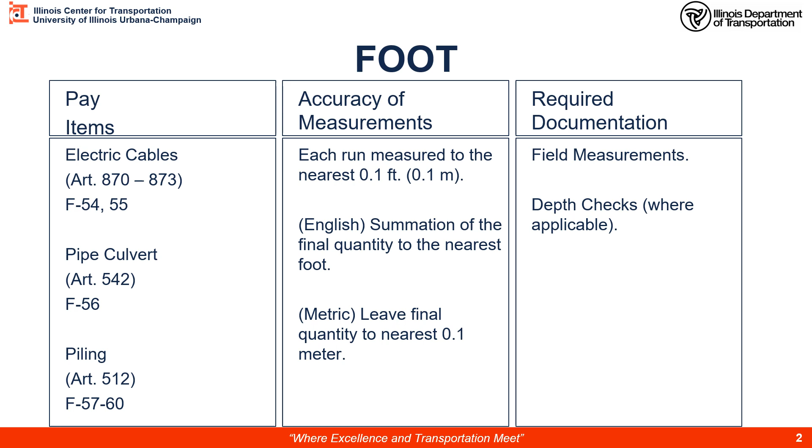Before we get too far into traffic signals, let's discuss the various components and the symbols that represent these components. First of all, there's a controller box, and this is its symbol, kind of an X with different shaded portions opposite each other. A foundation represented by a dark circle, and this could be a foundation for a signal post or a mast arm pole.

And then handholds, and there's two types of handholes, actually maybe three. There's a single handhole, and as you might imagine, if you have two of these symbols together, it's a double handhole. Sometimes you will see handholds in the traffic lane, as this one is, and it may be called a double handhold heavy duty or a heavy duty single handhold. So don't be confused by the heavy duty aspect of this. As far as cable length, it still represents a single or a double handhold.

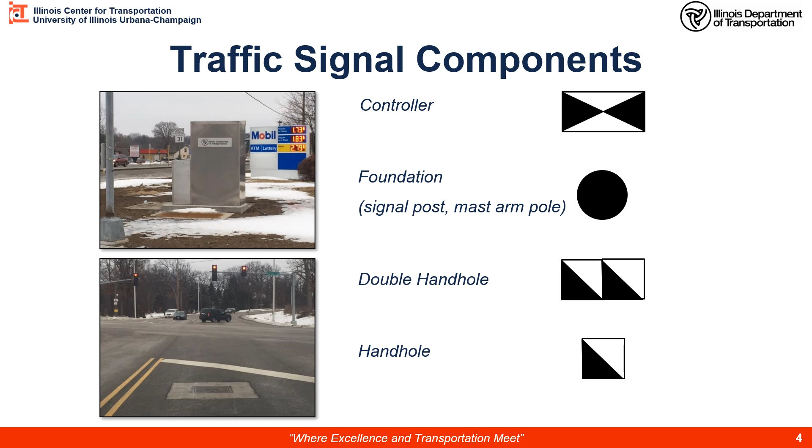Controllers also have foundations, so we must take that into account. Here you can see a post where a signal head would be up out of frame here. It has a foundation, so we must take that into account. And then on the mast arm poles, they each have a foundation. So these lengths need to be taken into account when calculating the cable lengths.

Covering some additional traffic signal components and their symbols. Here's a signal post. The circle represents the foundation, and then the arrow, the direction of the signal head. This is what it physically looks like. Here's your signal head, your post, and the foundation down here.

For mast arms, these are signal heads that are mounted on the arm. And then there's a type here called a bracket. This is a bracket mounted signal head. So these are represented as far as the mast arm foundation, the arm, and the direction that the signal head is pointing.

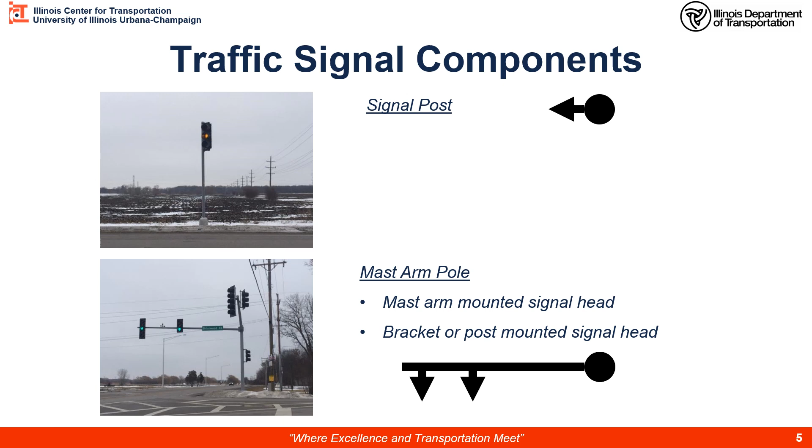Let's talk about the cable specifications. Here you'll find that by specification, all vertical, foundation, and handhold slack lengths are provided. So in the field, all we have to do is measure the horizontal lengths that are unique to your specific project. Let's first talk about the slacks. Most common in intersections are handholes, whether they're a single handhold or double handhold. A single gets 6.5 feet of slack, a double 13 feet of slack.

Moving on to the vertical lengths for different poles and posts. First of all, let's talk about the foundation. Almost everything has a foundation, right? Signal post, a mast arm pole, the controller all have foundations. Use 3 feet for the cable length on those. Mast arms that go up to the arm itself is 20 feet. That's the length you're going to use to calculate that height.

And then on the pole, if you have a bracket mounted signal, that's going to be 13 feet. And likewise, if you have a signal post, either a post mounted or a bracket mounted, that's 13 feet. Now, pedestrian push buttons are common, but for this class, we'll just deal with the poles and signal heads and the various handholds.

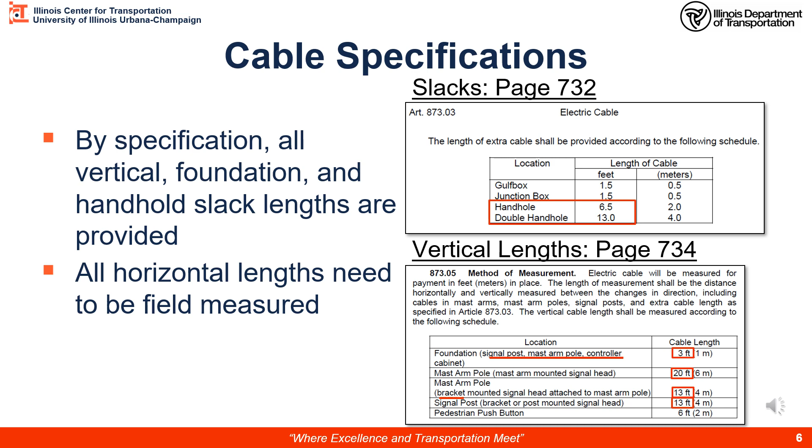Here we have a simple cross-section view of a cable run for a signal. First of all, we have the controller box, then we have the double handhold, and a single handhold. So we have slacks in these two. Then we go over to a signal post.

We also have foundations, right? Underneath controller boxes, underneath the post. So these are all provided by specifications. So the controller box has a foundation that is 3 feet. The post also has a foundation of 3 feet.

Go to the handhold. First of all, we come to a double handhole. That's a 13-foot slack. Then a single handhold. It's a 6.5-foot slack. And finally, the post has a vertical of 13 feet. So in the field, what we must measure is the lengths between these various features for our payment.

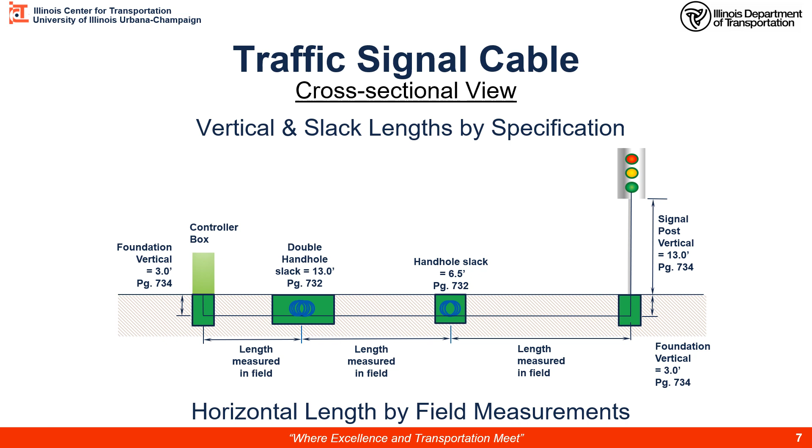Let's go to page F54 of your documentation guide. Here you'll find a field book laid out with some schematics of an intersection at Green and Goodwin. This first schematic shows the controller box, and then the cable runs to pole P1 and then to mast arm 1.

Notice that this particular pay item being looked at is for a 5 conductor. That would be for a red, yellow, green plus 2 additional wires, so it would be for either P1 or this first light on the mast arm. All cables are required to be home runs by IDOT, which means no splices along the way. So it's a continuous cable from the controller box to the signal.

This schematic gives some more detail because we have a number of handholds along the way. First handhole's a double one, 4 feet away from the box. Then in the intersection we have a heavy duty one, a single, another handhold, and then we branch off to the pole or post and to the mast arm. And that first signal head on the mast arm is 10 feet down to the 3 light signal. So you have all the information you need to calculate the pay length for 5 conductor signal cable.

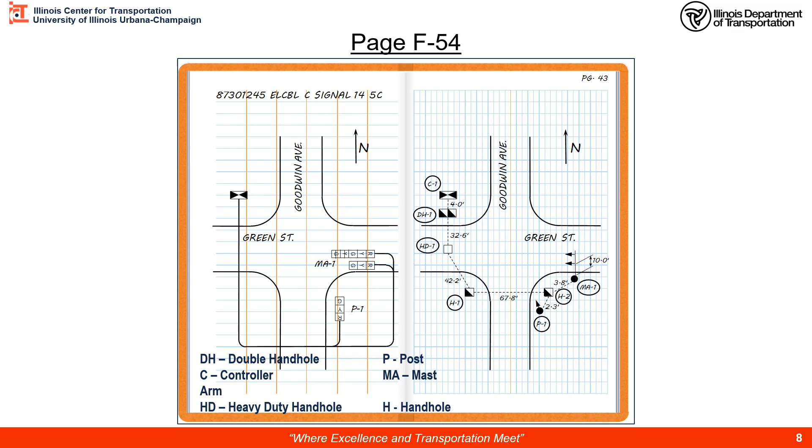So here's the same information, but in a cross-sectional view. Remember our controller, we have a foundation, a length, our double handhole, a length, our single handhole, which happens to be a heavy duty one, a length, another handhold, a length, then a handhold. Then we branch off into the mast arm or the post.

Then we have our vertical length plus a foundation for the post. At the mast arm we have the foundation for it plus the vertical length up to the arm and then 10 feet down the arm. So these 2 runs are what make up the 5 conductor pay item.

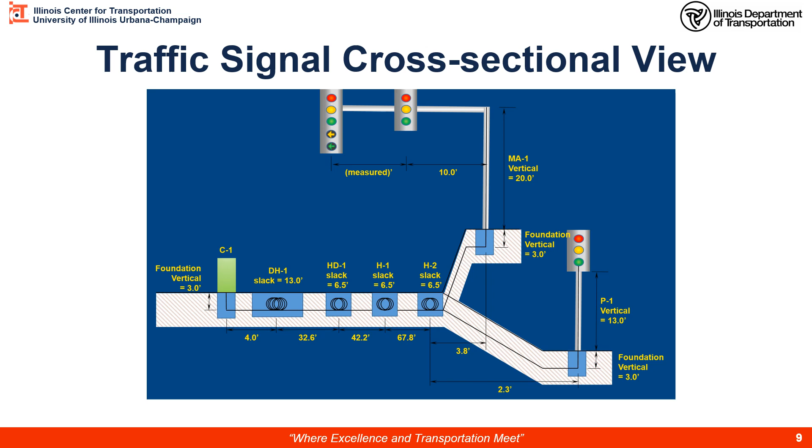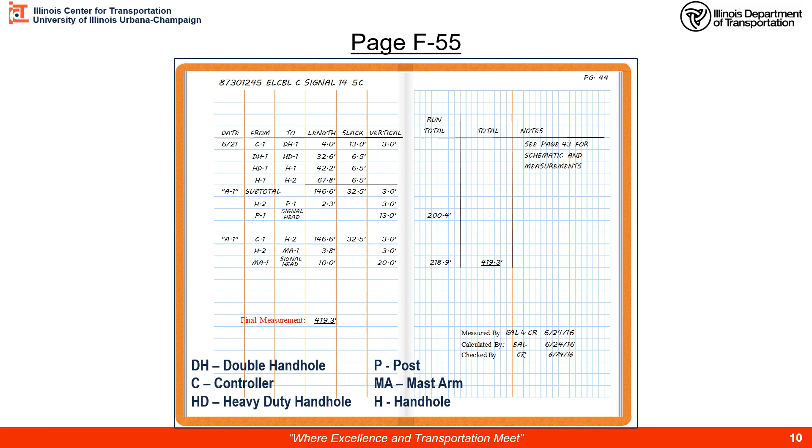Going to page F55 of the DOT guide to show you how these runs are laid out. This is that run A1 on the previous sheet, just to show you how they laid it out. And that is a common run to both the pole or post P1 and then the mast arm 1. So basically running this calculation as a subtotal and then adding on this little horizontal length and then up the pole 13 feet plus a foundation of 3 feet.

Likewise, on the mast arm from this point, you got that 3.8 feet, a foundation of 3, and then up the pole for 20 feet, and a final of 10 to the signal head. So just a little bit of accounting, how to do subtotals, so you don't have to recalculate all these runs continuously. If you have some common runs, just a little bit how to simplify your calculations.

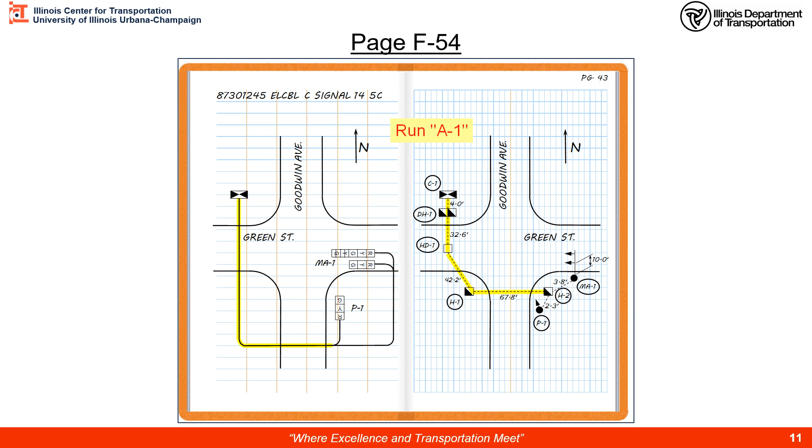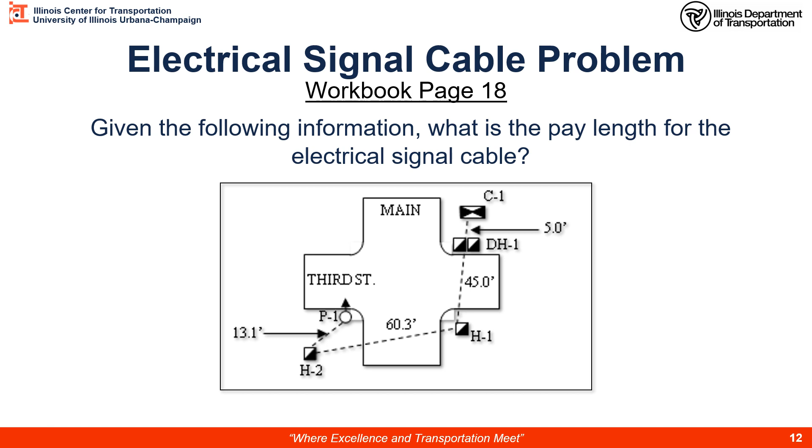Okay, it's time for a workbook problem. Go to workbook page 18 and work on this problem. For the answer, go to workbook page 35. Basically, you have a little bit of accounting here to do, a lot of things that add up, but you should have gotten 168.4 feet. Let's go over how to calculate this out.

Starting at the controller, C1, you got a foundation that's 3 feet, so you got to go down 3 feet. You measure a length of 5. You have a double handhole, 13 foot of slack, 45 foot of length to the next handhole, which is the H1, 6.5, and then 60.3 to the next handhole, which is 6.5 of slack, and 13.1, foundation of 3, and a vertical distance of 13. Those should all add up to 168.4.

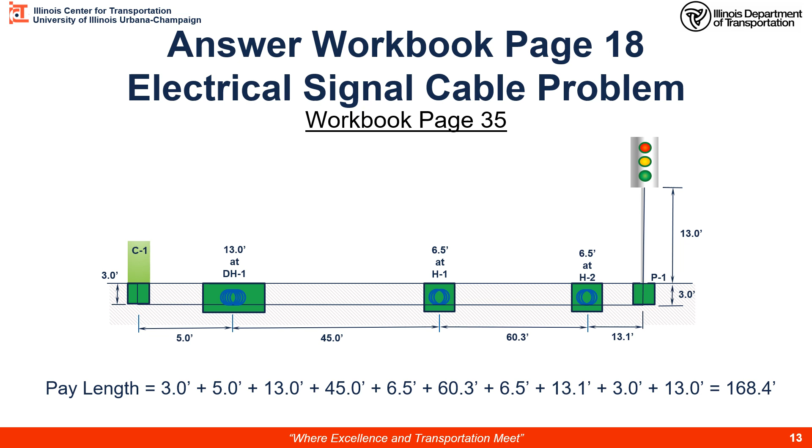Let's go to workbook page 36. It's also presenting the answer to the work problem on page 18. It's just a way that you could lay out your field book. It's not the only way, there are other ways. Whatever makes sense to you, but the main thing is to recognize that there are horizontal measurements, slack, and verticals to account for, and that all your accounting is properly done, and then it adds up to the proper length.

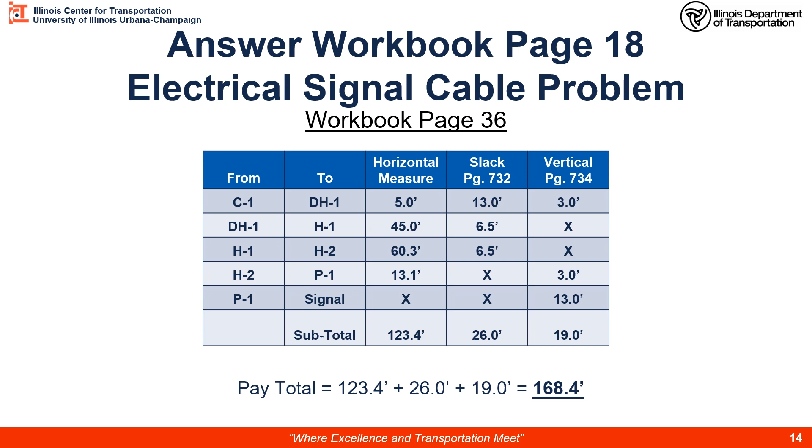Let's go to page F56 in the documentation guide and talk about pipe culverts. There's a couple steps involved with pipe culverts. First, look up the plans, make sure that the plan matches what's in the field. Field entrances especially come and go, so you have to check to make sure that they match. Over time they could have changed or have been moved from what's on your plan.

Then you're going to stake out what is to be provided by the contractor and what size, the description of it. The contractor is going to then install the pipe culvert. You're going to go back and check to make sure that they installed the correct size, and to measure the length again.

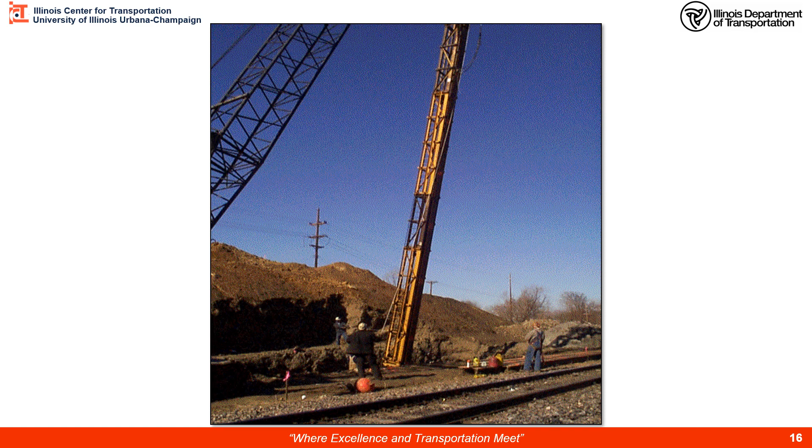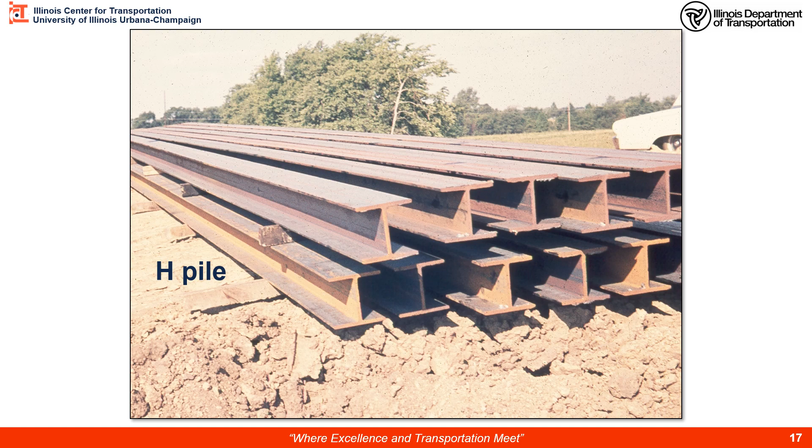In Illinois, it is very common to use H-pile or metal shell pile for bridge foundations. The reason we call it H-pile, it's in the shape of an H. Very simple. A length of it to be provided and then driven into the ground to a certain bearing capacity for the bridge foundation. For piling, there are two pay items, one for furnishing and then for driving.

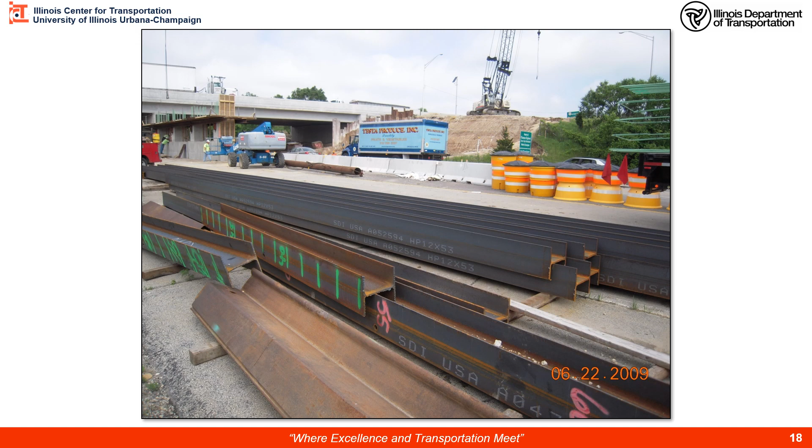Here you can see some piling that has some marks on it. This pile has been driven into the ground. The foot marks on here are used to determine how many blows per foot, and then it's cut off at the elevation they've gotten bearing for that pile. One of the main jobs of the inspector is to measure the pile as it arrives. Make sure that you have lengths on these, because once they're in the ground, you do not know how long it was. And it will be difficult to pay for it.

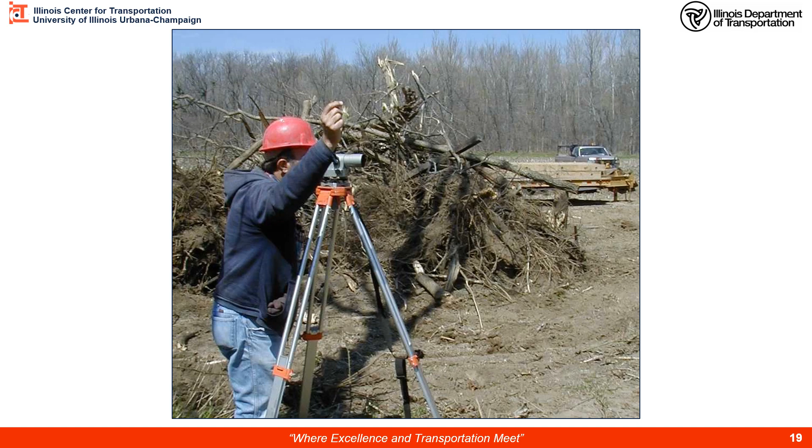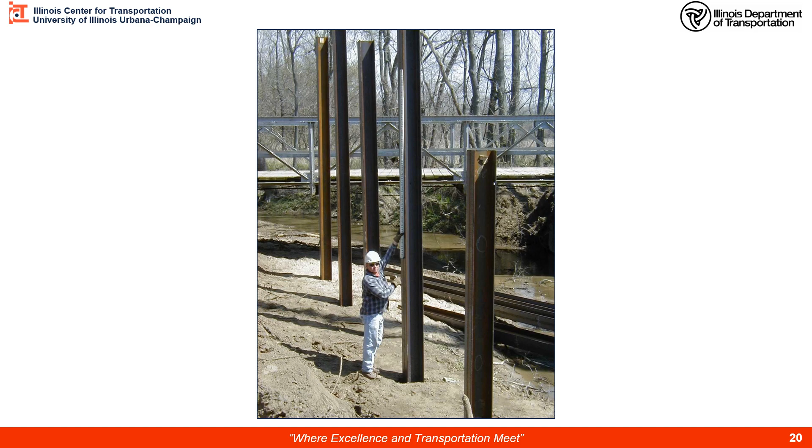Once your pile is driven in, you're going to get an elevation for the cutoff and determine the driven length. Here the rodman's trying to get the rod the right elevation to determine the cutoff length. Here's a metal shell pile that they've gotten an elevation on the top of the pile the way it was driven and determine the cutoff length down below.

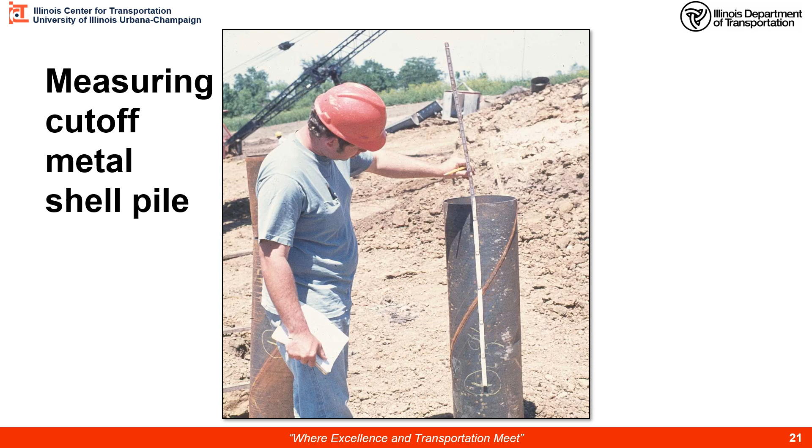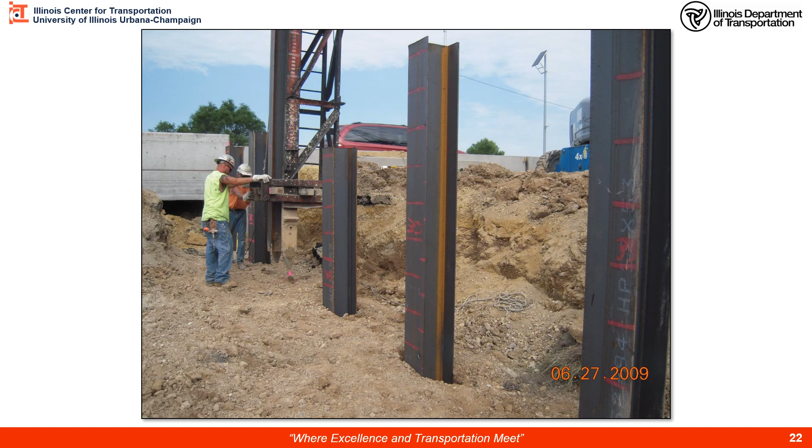If you go to your documentation guide on page F57, you'll see an example letter for piling. On this particular job example, the contractor had driven test piles on February 18th, and from that log and that information on those test piles for each abutment and pier, a determination was made on what the length of the piling should be on the rest of the piers and abutments. So this letter provides the lengths to be provided on the job.

Here we have a payment example for piling. First, as we discussed, you're instructing the contractor to furnish a pile length. In this case, 45-foot piles. And you've measured this on the job site when it arrived. So that's the length to be supplied. It's measured upon delivery. In this case, you asked for a 45-foot. You came out with a 45.75-foot pile.

So to determine the length for furnishing pile, we're going to reference our letter and compare it to the length provided. In this case, we're not going to pay for anything more than what was asked for, so our paid length for furnishing is 45 feet. If this pile was short a couple tenths of a foot, we would pay for only what was actually provided.

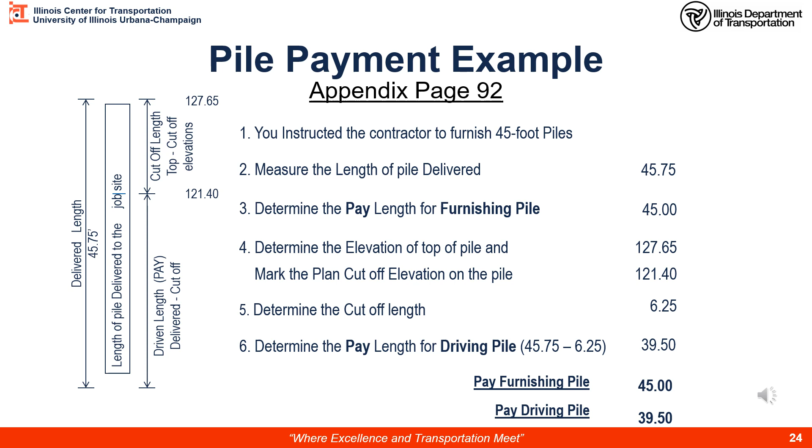Let's go to the documentation guide, page F58, and we'll see an example of some pile driving. It is not the intent of this course to give you a lot of detail on driving pile. There's a whole course dedicated to that, but we want to get you familiar with the basic layout and documentation so that you can pay for furnishing and driving pile. So the basic header information: contractor, what pay items you're working on, what crews are involved, the crane. Very important for determining the pile bearing is the hammer and the energy of the hammer.

So here's a nice layout of the abutment or the pier, as the case may be. So we have a pile number, heat information for what heat it came from, what length was asked to be furnished. In this case, all 50 feet was from that letter to be provided. And then what lengths were actually delivered. So this is the delivery length. And then we drove it and then determined the cutoff and the driven lengths.

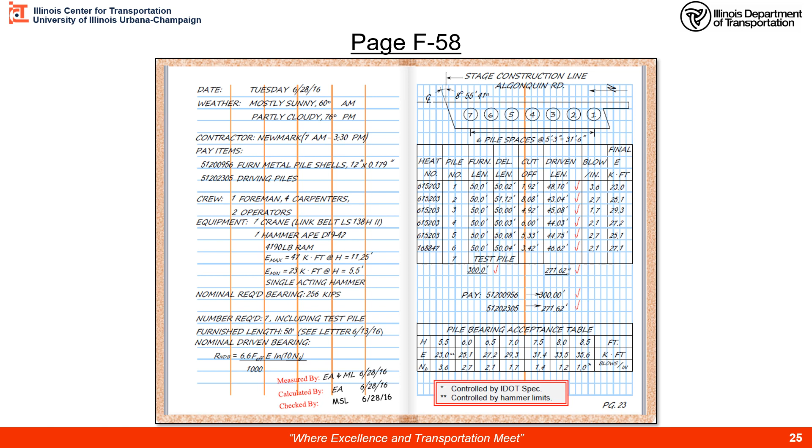Also in the documentation guide on page F60 is a bridge office form on production pile driving. The intent of this form is to clearly document how the abutment or pier was laid out and what information is available on that pile. And again, some delivered information, if there's any splices, the cutoff length, what you paid for driving, and the furnished lengths that were paid. And then there's some blow information and hammer information and a determination of the bearing on that pile and any notes or comments.

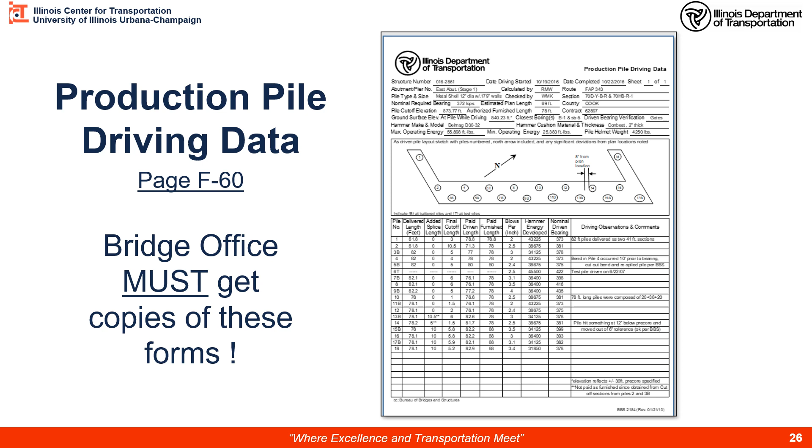So these go to the bridge office. This becomes part of the file for that bridge and that pier. Many years in the future, it may be looked at for widening a bridge to determine if that foundation is sufficient to widen the bridge, or if there's some other issues nearby. Perhaps there's a new bridge being added nearby, and this would be good information for that new bridge.

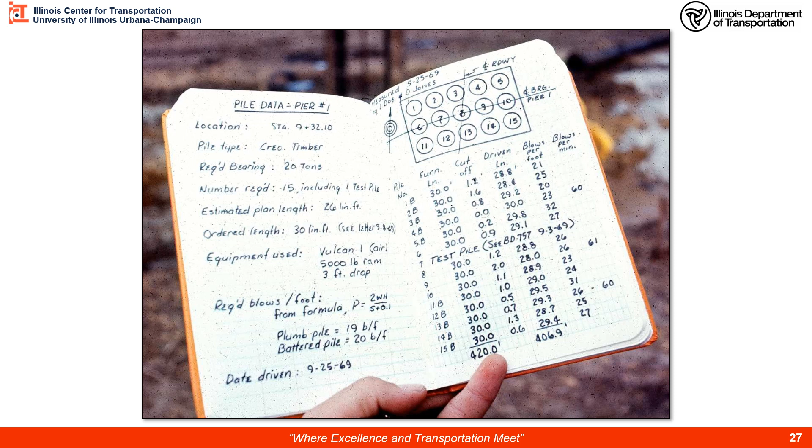Just an example that the documentation of piling has not changed that much over the years. Here's 1969 information. As long as it's neat, with cutoff, driven, blows per foot type information, you can develop that form and provide it to the bridge office.